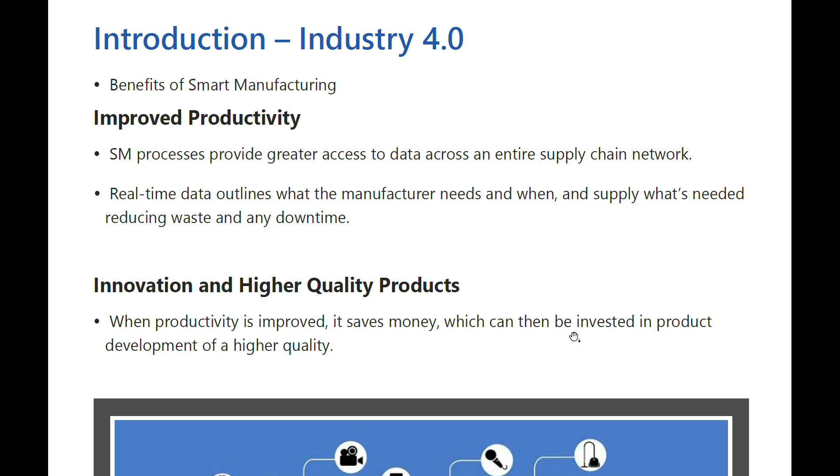Improved productivity creates greater access of data across the supply chain network, and real-time data operates the manufacturing, resulting in knowing what and when you need to know, and supplying what is needed to reduce waste and downtime. Innovation with higher quality products saves money, which can be invested in product development of higher quality.

So with that, we want to know a little bit about more jobs. Adopting smart manufacturing is a way to attract a more tech-savvy workforce, because the traditional piece of it is a little bit more difficult to hold on to more techy stuff.

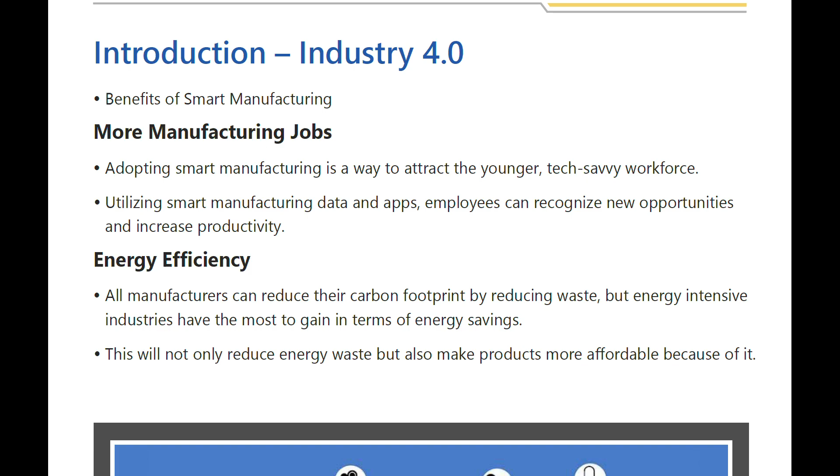So utilizing some of the data apps, we can recognize new opportunities. And then energy efficiency, where manufacturers can reduce some of the carbon footprint, reduce energy in energy intensive industries, so that it gains more energy savings. This not only reduces energy waste but also makes products more affordable because of this.

So the paradigm of manufacturing is five common trends that we can see.

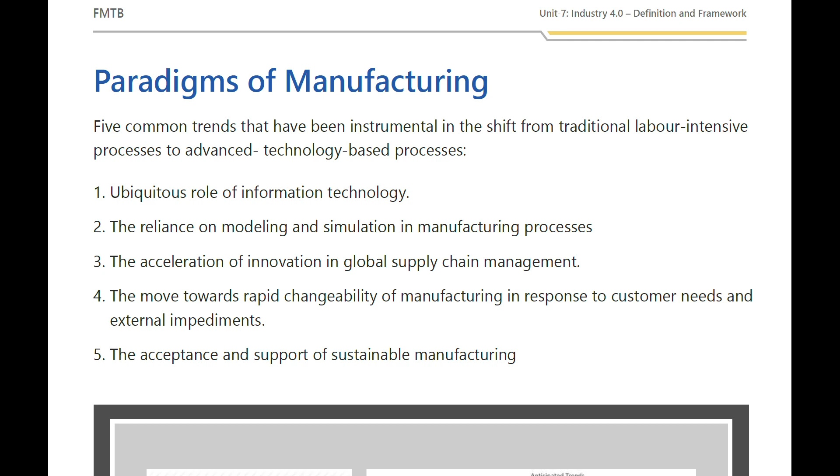The shift from more labor intensive to a more advanced technology based process. So the ubiquitous role of information technology, relying on modeling and simulation in the manufacturing processes, is actually much better in hand, and acceleration of innovation in global supply chain management, moving towards a more changeability of manufacturing in response to the customer's needs and external impediments, accepting the support of sustainable manufacturing. So all these are some of the five common trends that's shifting from more labor intensive to more advanced technology based processes.

So I want to introduce some interesting words, called Industrial 4.0, which is a revolution of cyber physical systems, sometimes called CPS, towards the end of the supply chain, IIoT, Industrial Internet of Things, decentralized intelligence in manufacturing, production, logistics, and industry, utilizing cloud computing and cognitive computing.

So Industrial 4.0 is some digital transformation. It makes the market with smart manufacturing currently on the forefront, and 4.0 is commonly referenced as the industrial revolution, right? So 4.0 also represents the fourth industrial revolution in terms of more discrete and process manufacturing.

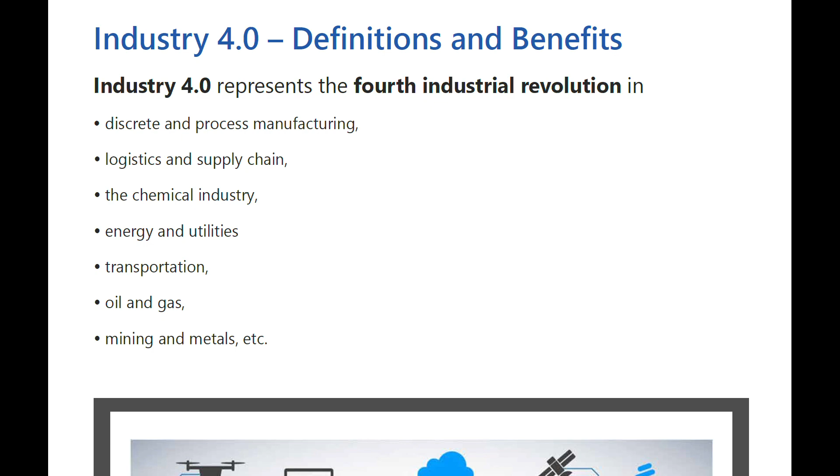Discrete means that it's pretty on and off, meaning it's more focused. It also helps the logistics supply chain and the chemical industry, energy and utilities, transportation, oil and gas, mining, and metal itself. So we'll now share a little bit about the first industrial revolution.

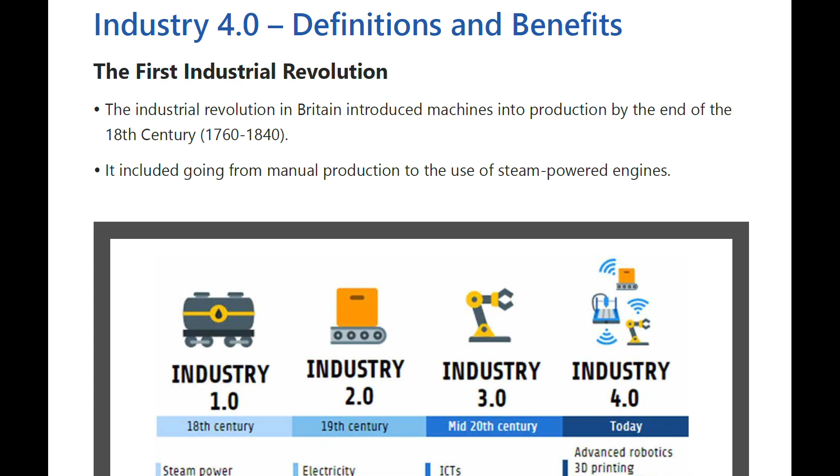Sometime in the 1760s to 1840s, Britain introduced machines which actually moved production at the end of the 18th century. So the steam power engine was invented, and that moved production from manual production to a steam power engine. So this is the start of the first industrial revolution.

So as you can see, the first industrial revolution talks a little bit about mechanical production moving from the cottage industry. So before that, it's still very farming based.

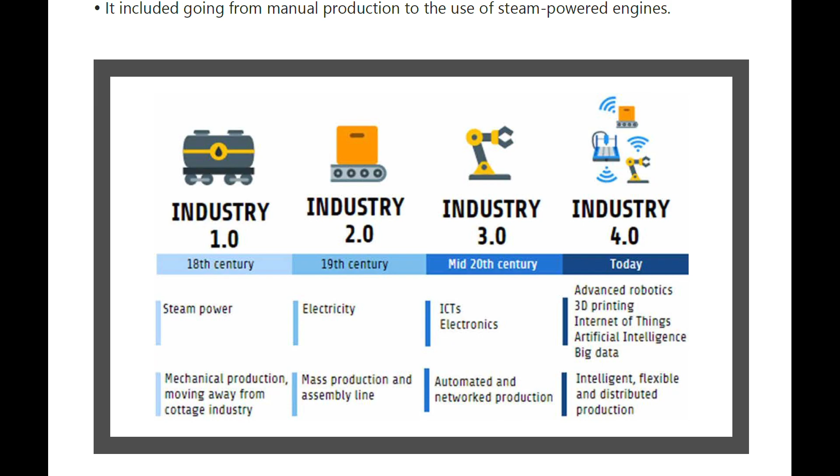So Industrial 2.0 is moving to electricity, where there is mass production in the assembly line, right? So as you can see, some of the primary means of production has moved from steam power to electrical power. One of the key things is like a train.

So it used to be a steam engine, now has become an electrical train as the source of power, so it's much higher power ability to move more, better, stronger, and more powerful. So electrification of factories contributed significantly to the production rate, driving the product cost down. So the production of steel, railways, and goods moved faster and easier between different places.

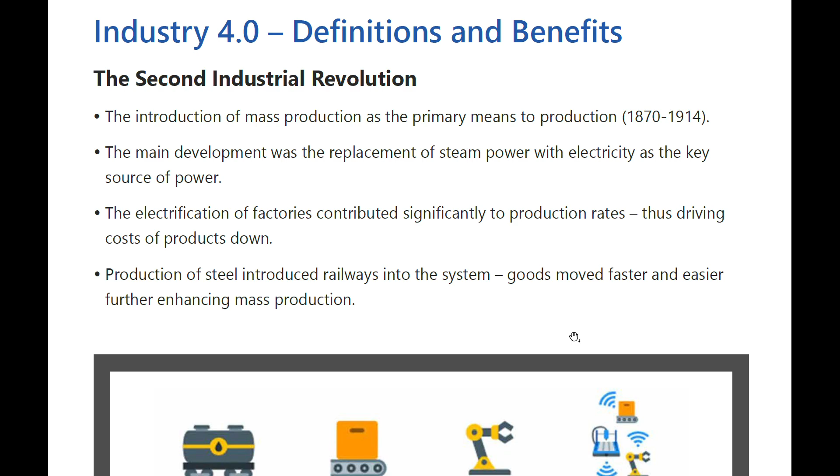Since you enhance the mass production, then you come to Industrial 3.0. So Industrial 3.0 is also called the third industrial revolution, often referred to as the digital revolution, brought by the change from analog and mechanical systems to digital systems. So sometime between the 1950s to 1970s, this is also called the information age.

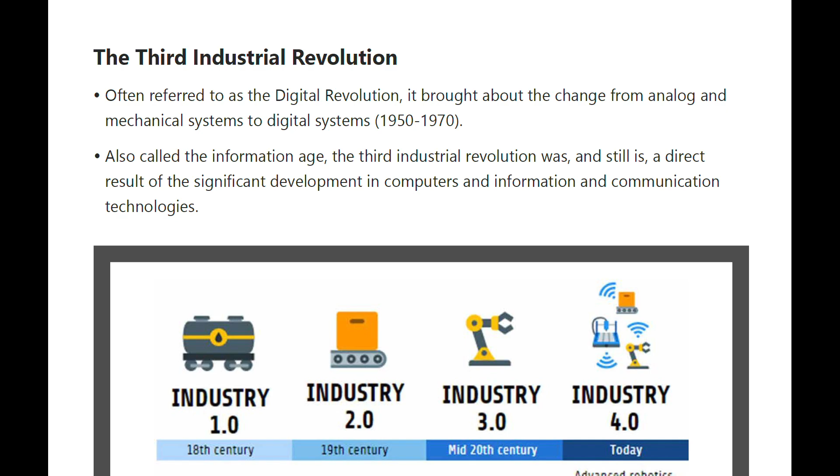The industrial revolution is still a direct significance of development in computers, information and communication technologies. So basically, Industrial 3.0, we have changed it to more electronics.

Coming to this age right now is the fourth industrial revolution. It takes things into a new level, introducing customization of flexible mass production, where machines can operate independently and cooperate with humans in creating customer-oriented production that maintains itself. This is made possible by introduction of self-optimization, self-cognition and self-customization, meaning it's able to redesign itself in a very personalized way.

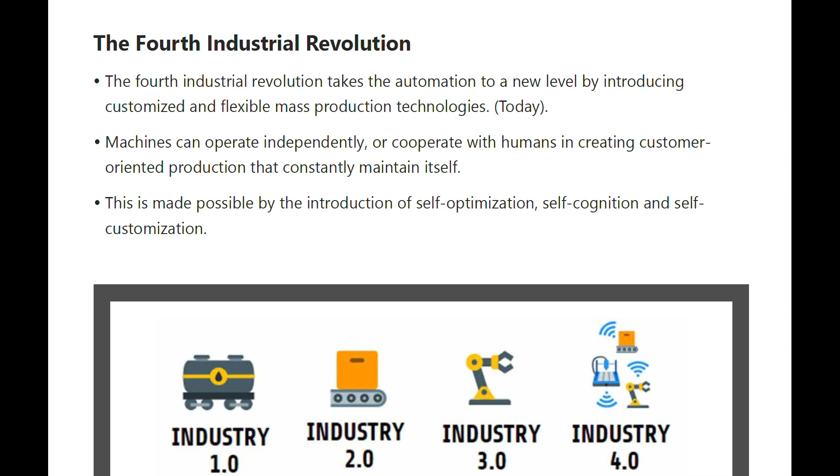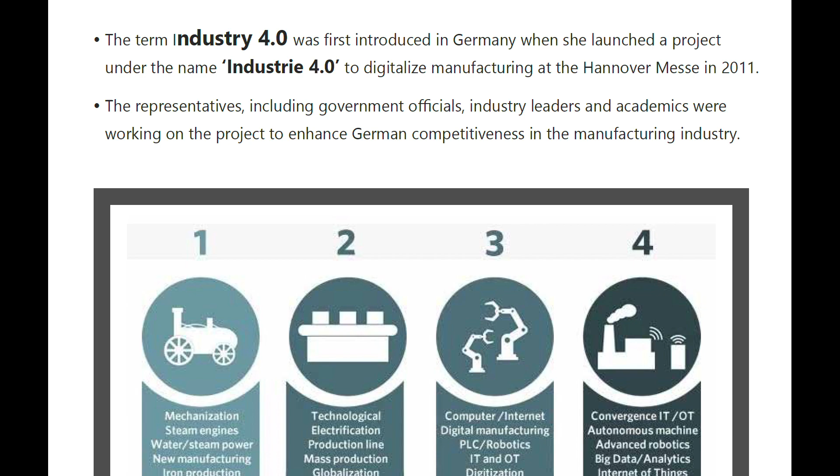The term Industrial 4.0 was first introduced in Germany, launched as a project called Industrie 4.0, a digital manufacturing initiative at Hannover Messe, with representatives including government officials, industrial leaders, and academics working on it to enhance German competitiveness in the manufacturing industries.

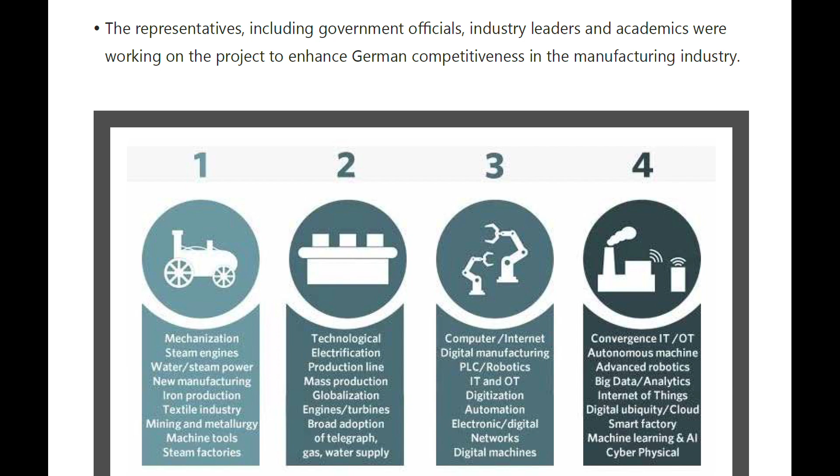So it's converging from IT in the industrial internet to OT, or operational technology, and autonomous machines through big data analytics, digital ubiquity, cloud, smart factory, machine learning, AI, and cyber-physical space.

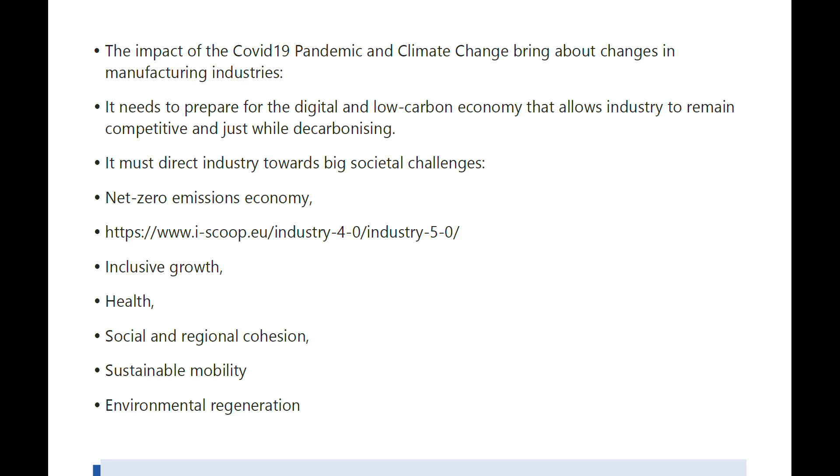The impact of COVID-19, about 2 to 3 years ago, actually helped accelerate this in order to prepare for digital with a low carbon economy. The industry remains competitive as well as decarbonizing, and we must move directly towards a bigger societal change, like a net zero emission economy, including inclusive growth, health, social and regional cohesion, sustainable mobility, and mobile environmental regeneration.

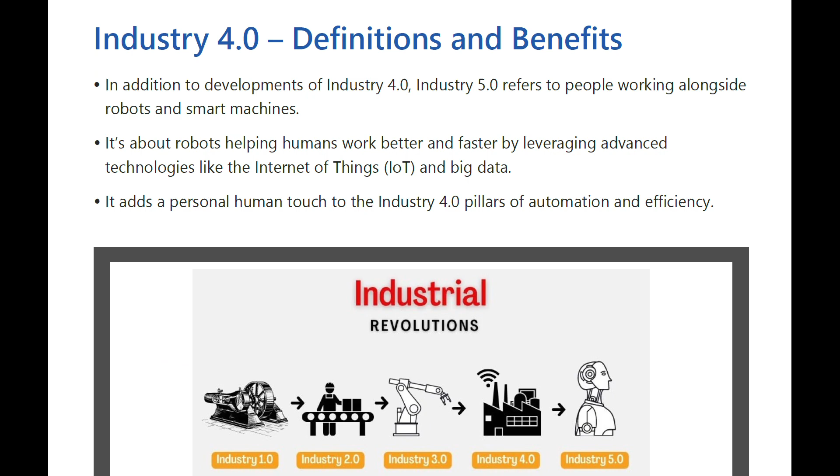In addition to the developments of Industry 4.0, Industrial 5.0 refers to people working alongside smart robots and machines. The robots help humans work better and faster, leveraging advanced technology like IoT and big data, with machine learning becoming a large part of it. It's a human touch for the industrial pillars of automation and efficiency. Industrial 5.0 talks about human-robot collaboration, cognitive systems, and customization.

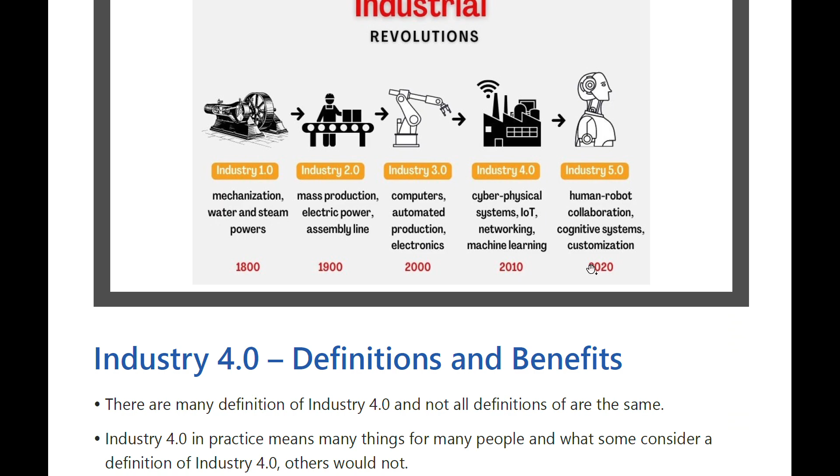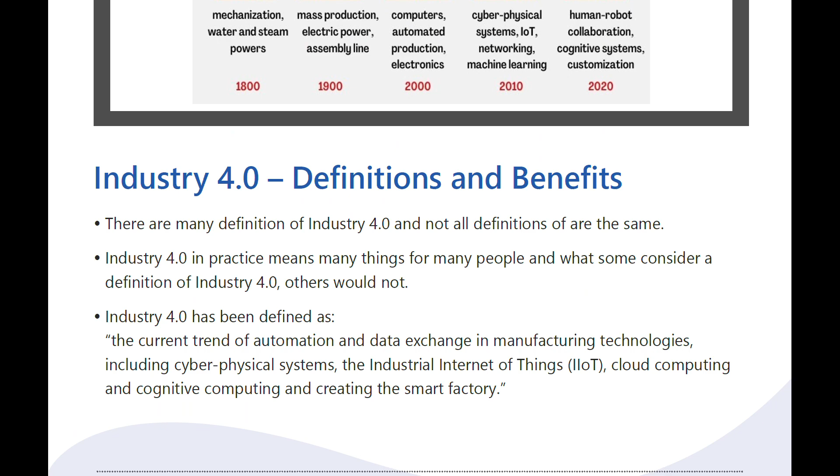There are many definitions of 4.0, but not all are relevant. In practice, Industrial 4.0 means many different things, and some consider it Industrial 4.0 while others would not. But in general, the trend of automation, data exchange, cyber systems, industrial internet of things, and cognitive computing creates a kind of smart factory.

So there are 5 reasons why this is relevant and important. Current challenges for manufacturers include market volatility, shorter life cycles, higher product complexity, and global supply chains. Companies need to be faster and more flexible in responding to business trends.

The digitalization of the entire product will allow the use of data exchange in production services and social media to make the product faster and cheaper in terms of improvement. Companies can then reach faster demand, implementing new configurations and replanning more easily for much faster changes.

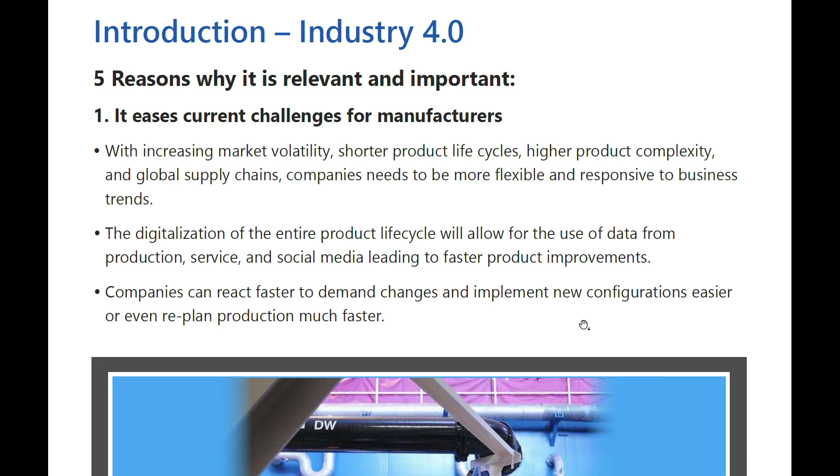The other piece is Industry 4.0 also leads to an innovation economy. Digital chains will not only improve efficiency but also speed up innovation as business models are implemented much faster. For example, to speed up innovation, a manufacturer can generate new business by sharing equipment and selling capacity they do not need in the market.

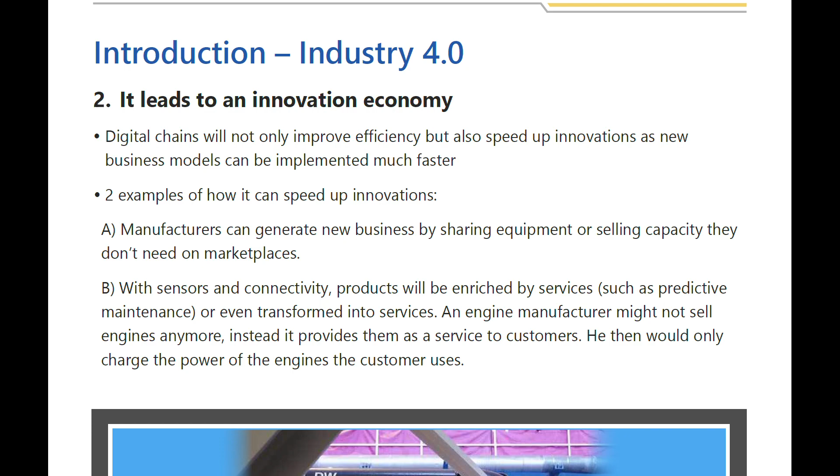With sensors and connectivity and enriched services such as predictive maintenance, this even transforms into service. The engine manufacturer could stop selling engines, but instead provide services to customers, charging based on the power of the engines the customers use. Chilled water as a service is also part of this model.

Number three, it puts customers at the center of activity. Customers now become individuals that make products and services personalized. With smart items, products and machines enable manufacturers to get down to a lot size of one.

It produces one, unlike Industrial 2.0 which was mass production - now the production is like one piece. The other part is that digitalization will also lead to easier crowd sourcing and faster design processes.